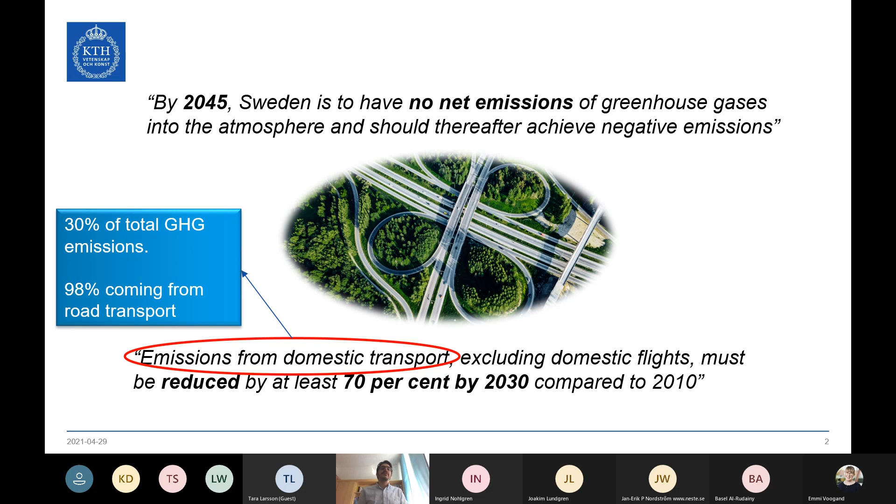Here, biofuels of course play a very important role in this transformation, but the question is whether we are really able to achieve these goals. The numbers needed are somewhat high. We need around 3 million cubic meters of drop-in biofuels by 2030. By drop-in biofuels, we mean fuels that have the same chemical structure and composition as the ones that come from fossil-based resources. And we see that this number currently cannot be met with the existing production routes.

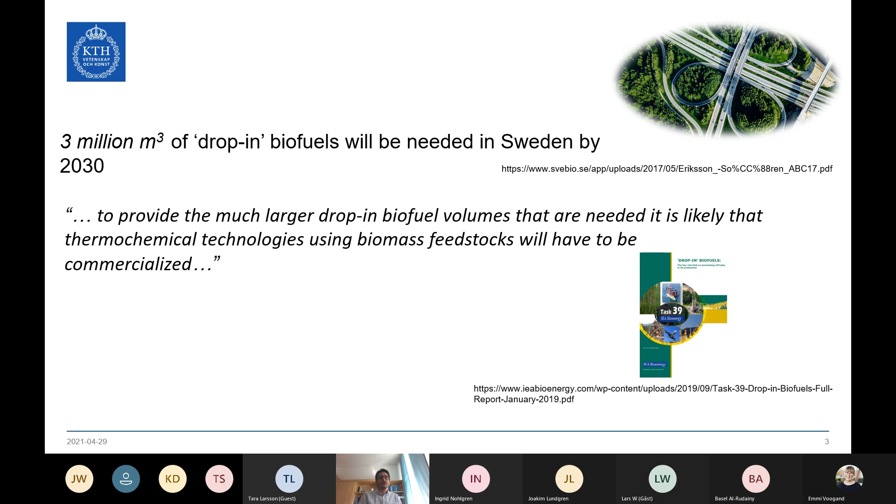In the same wavelength, a recent report by the International Energy Agency indicates that in order to provide the much larger drop-in biofuel volumes that we need, we need to commercialize thermochemical technologies that utilize biomass feedstocks. So in order to achieve this 3 million goal, we need to use forest residues and forest resources. But does Sweden have the potential to achieve this amount of fuels via thermochemical processing? Well, the answer is yes.

The forest sector has a very high energy potential in Sweden, and logging residues and sawmill byproducts account for around 7 to 27 terawatt hours of energy potential, which almost covers the 3 million cubic meter demand for biofuels in Sweden. Therefore, the forestry sector and the utilization of lignocellulosic residues is crucial for reshaping the transport sector. The production will be accelerated and enhanced by the commercialization of thermochemical treatment. But what do we actually mean by thermochemical treatment of biomass for production of drop-in biofuels?

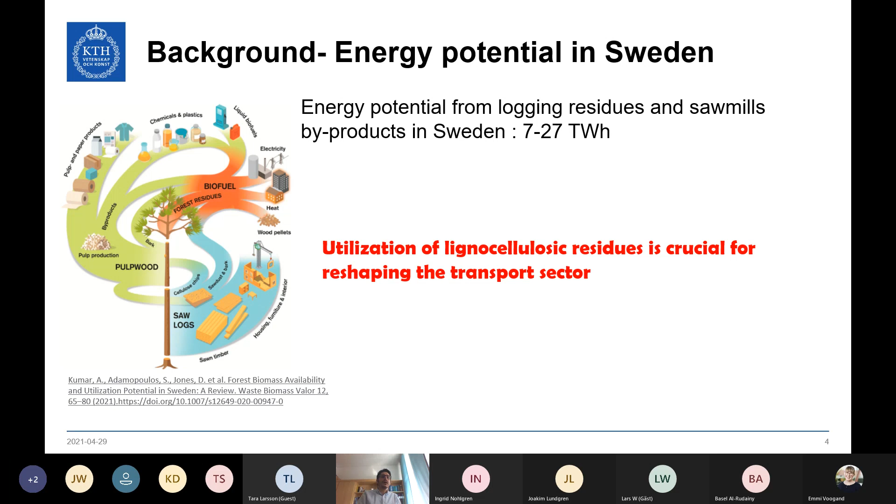If we consider the biomass resources, the forest residues, we have two main thermochemical routes that can achieve production of drop-in biofuels. These include gasification, where the biomass is subjected to a high-temperature environment in the presence of air or oxygen, and gives rise to gaseous molecules, also called syngas. Those molecules that are formed undergo a synthesis process.

Typically, the synthesis we use is the so-called Fischer-Tropsch process, a process invented almost 100 years ago by two German chemists, Franz Fischer and Hans Tropsch. And the product of this synthetic process is a fuel which is identical to the fuels we can actually get from oil.

The other thermochemical route that we typically use for biomass processing is biomass pyrolysis, which is practically the thermal decomposition of biomass. We heat the biomass in the absence of any oxidizer, and the products are vapors, or liquids if we cool them down. And they undergo another type of treatment and upgrading or synthesis process, if you like, that produces a drop-in biofuel.

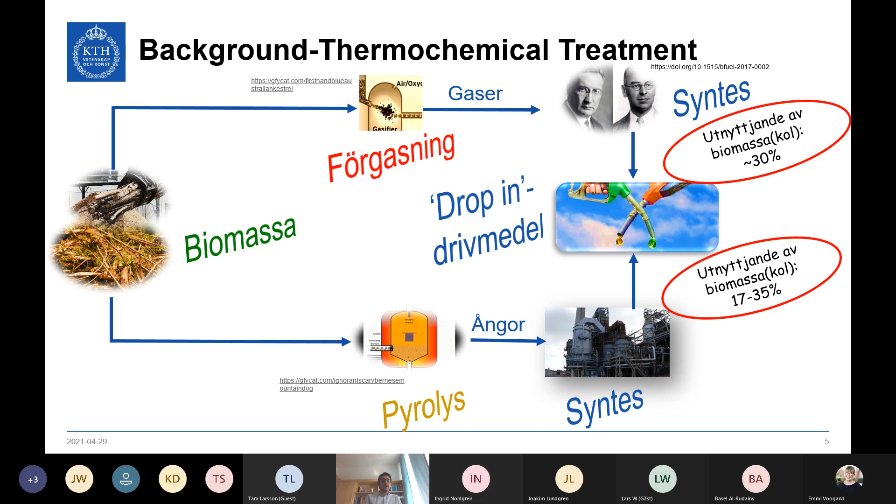So as we see, almost 1/3 of the carbon that is actually present in the biomass can be converted into liquid fuel. So if we are to achieve the goals for 2030 and replacement of fossil-based transportation fuels, we need to be more efficient in the conversion of the biomass contained carbon, given that the availability of biomass is sometimes limited. So the BioFlex project actually tried to answer 3 questions.

Those 3 questions are whether we can really improve the carbon utilization in the biomass conversion, and if so, what do we really need to do in order to do that? Do we really need to reinvent the wheel or invest in research time for new processes that can give us better carbon utilization? We have to think that we need to act fast in order to achieve the goals that we have set for 2030.

2030 is not far. So it has to be processes that can be implemented relatively fast. And the results should be, of course, tangible within a very short time. Of course, other processes can also be researched in parallel to these activities, but we need to act now. And the third question that we try to answer is, what happens with the fuel mix demand? How can the processes that we design today, targeting 1 or more products, meet the future fuel mix demand in Sweden in particular?

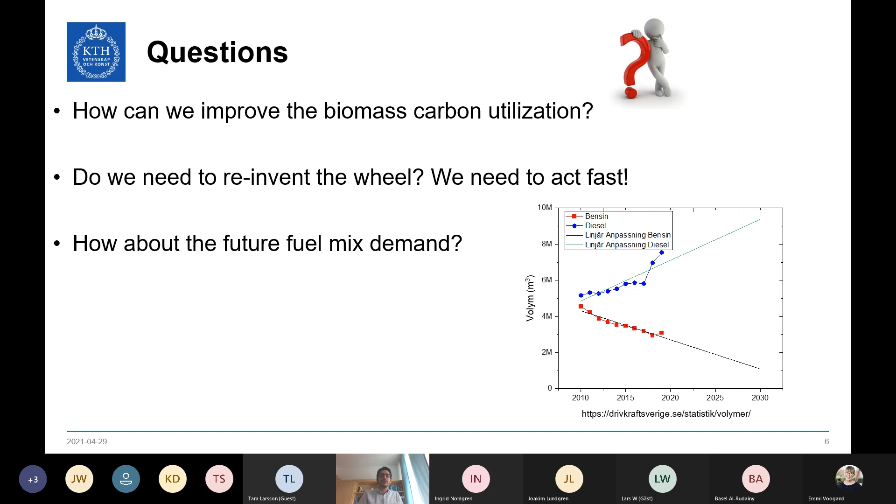Here we see the volumes of fossil-based gasoline and diesel that have been used in Sweden the past years, and a linear projection to 2030. We see that the fuel mix demand shifts towards diesel production. We still, though, have a considerable demand for gasoline in place even by 2030. So the concept of the BioFlex project is to try to answer all of those 3 questions. That means to try to provide efficient carbon conversion with processes that can be implemented fast, in a short time, and thirdly, processes that can produce fuels or products that are flexible in composition in order to meet the market requirements.

So the BioFlex concept includes the biomass treatment via pyrolysis mainly, and then synergies with gasification, that is the solid carbon that is produced in the pyrolysis section giving a feedstock for the gasification, and gasification itself providing energy for the pyrolysis section. And ideally, those 2 primary products of those 2 processes, the pyrolysis vapors and the gasification gases, would need 1 synthesis process in order to produce the drop-in biofuel.

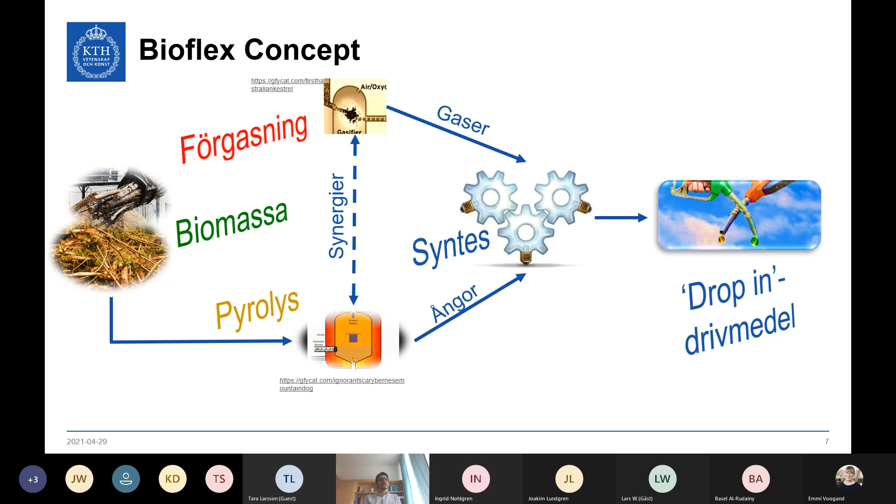But if we now take a closer look at the synthesis process, is it really realistic to consider that we can have one synthesis process for those two primary streams of the thermochemical treatment of biomass to produce the drop-in biofuels? Unfortunately, the answer is no, because given the completely different chemical nature of those two streams, the gases from the gasification and the vapors from pyrolysis, it is almost impossible to find one synthetic route to produce the drop-in biofuels. However, instead, we can produce some platform molecule or building block from both streams that can be effectively converted into a drop-in biofuel, and this process can also be flexible in terms of product composition.

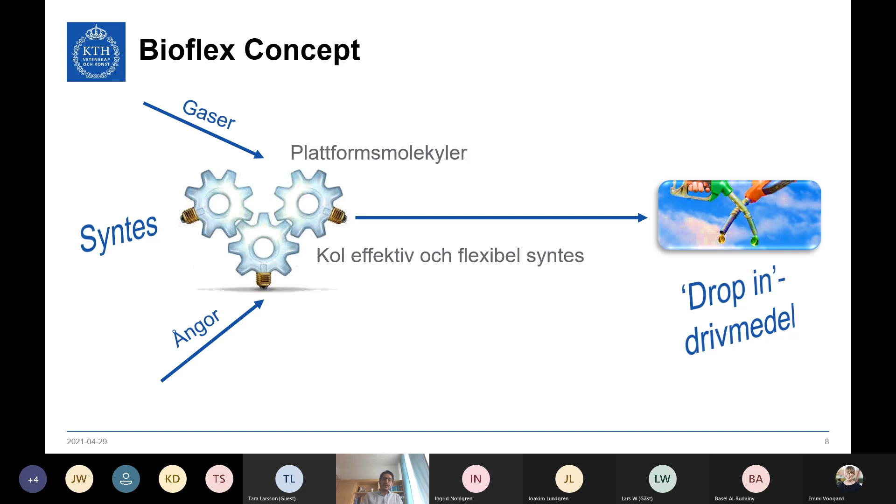That molecule has been identified, and it's actually not a molecule but a group of molecules, the olefins, which are light hydrocarbons with carbon numbers ranging from 2 to 4. As an indication, gasoline has carbon numbers of 6 plus, and diesel carbon numbers of 11 plus. And these molecules can be converted efficiently into both gasoline and diesel range hydrocarbons or drop-in fuels via the Mobil olefins to gasoline and distillate process. This process was developed by Mobil, now called ExxonMobil, in the late 70s after the oil crisis.

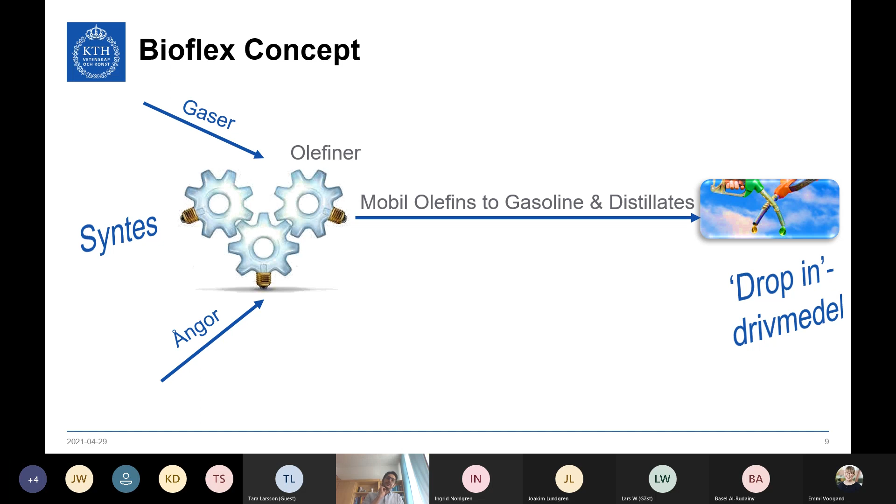But why specifically olefins? What is particular with those types of molecules? Well, first of all, they can be converted into hydrocarbons with a very high carbon efficiency. Typically, more than 95% of the carbon contained in the olefins can be converted into liquid fuels via the Mobil process. And of course, they are a chemical commodity of high demand, which can give rise to the production of different chemicals, polymers, lubricants, and so on. And this gives an extra value to the BioFlex concept, because even after a complete electrification of the transportation fleet, there will still be a market for the olefins that this process will produce.

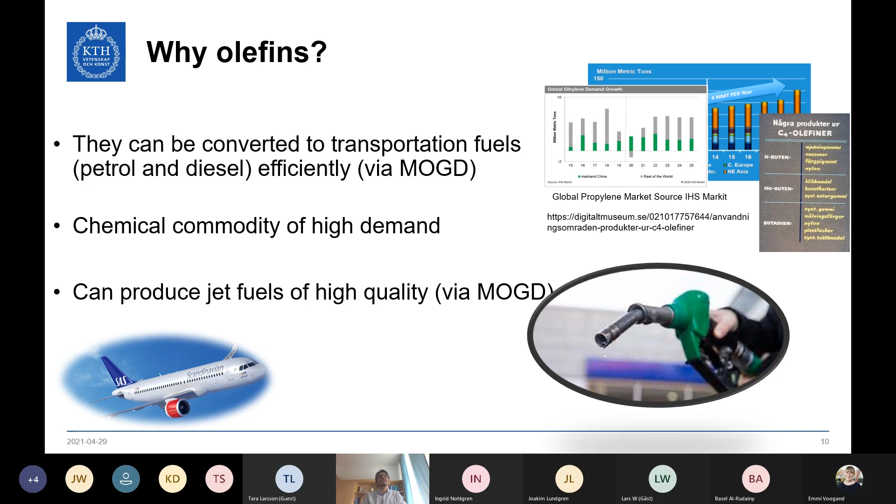Thirdly, on a similar wavelength, we can also produce jet fuels of high quality via the Mobil process, which is also an advantage if we consider that aviation fuels will probably be longer in the market as compared to the transportation fuels. So now it is clear why olefins were chosen, and in this project we investigated three main scenarios.

The first process concept included the gasification route for biomass, the standalone gasification route, where the biomass is converted into syngas using oxygen as an oxidizer, and then the produced syngas is converted into light olefins, and then the olefins converted into transportation fuels via the Mobil process.

The second process concept is a combined pyrolysis and gasification route, where the biomass is pyrolyzed and the solid carbon is converted into syngas via the gasification with oxygen. And both the primary products from the gasification and the pyrolysis are then converted into olefins, and then the olefins again are converted into drop-in biofuels.

The third process that was investigated is very similar to process concept 2, with the difference here that air is used instead of oxygen for the gasification part, which means that in the second process concept, the nitrogen is separated from the air before the gasification, while in process concept 3, the nitrogen is separated downstream the gasification before the syngas to olefins conversion process.

In all the process scenarios investigated, small to medium scale plants were considered, 5 to 50 megawatt biomass thermal input. Roughly 1 ton per hour of biomass, just to give you an idea, is around 5 megawatt of size. And for every concept, 2 product mixes were considered, those corresponding to the 2020 and 2030 fuel mix. When we say fuel mix, we refer to a ratio of gasoline and diesel.

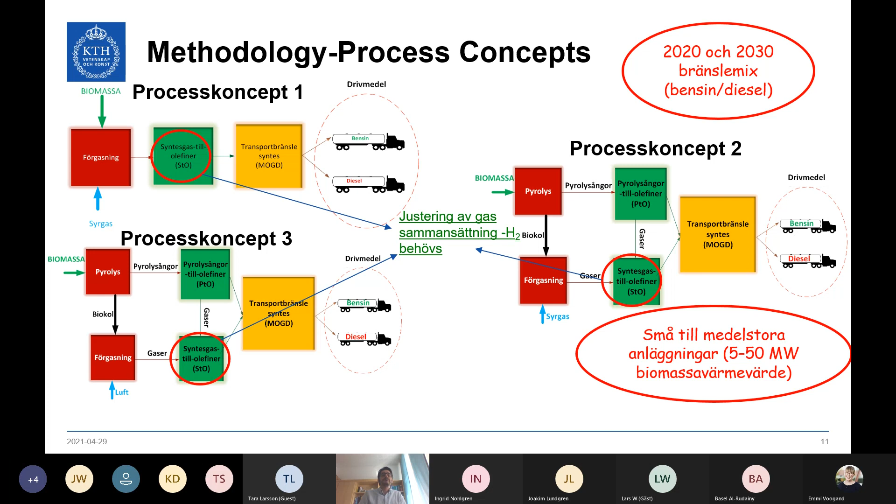So if we now go to the main process analysis results, we see that the combined pyrolysis and gasification scheme, which is represented in process concepts 2 and 3, gives considerably higher carbon efficiencies, almost 40%, while the standalone gasification of biomass gives a carbon efficiency of almost 30%, which is typical of a gasification process for production of drop-in biofuels.

Similarly, the energy efficiency for process concepts 2 and 3, which are the combined pyrolysis and gasification processes, is almost 50%, including also the electricity needs. So from those numbers, it's clear that the combined pyrolysis and gasification plant actually gives a better performance and a better overall efficiency.

One thing which is crucial though for such a process is the performance of the gas separation units, because any carbon losses in those units are very crucial if we want to achieve the high carbon efficiencies here.

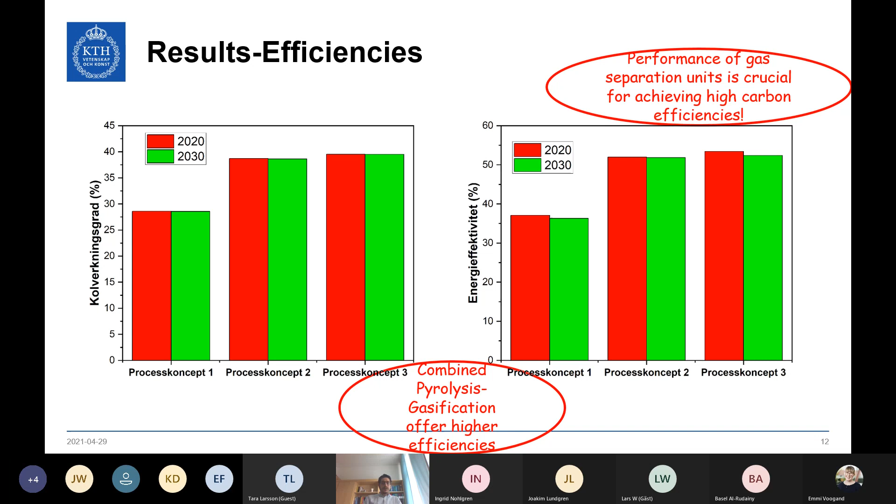But what do these numbers actually mean in terms of the 2030 goals? What do we really achieve? If we translate those numbers into actual fuel production, we see that we can achieve more than 300 liters of total liquid fuels if we combine the gasification and pyrolysis routes.

And also we see that the direct CO2 savings by substitution of the fossil-based fuels is almost 800 kilos per ton of biomass that is utilized in the process. Just for comparison, 1 ton of CO2 roughly corresponds to driving almost 6,000 kilometers with a fossil-based diesel car.

We see that the adjustment in process conditions to match the 2030 and the 2020 fuel mix does not affect the efficiencies nor the CO2 savings in any of the process concepts 2 and 3, which is indicative of the flexibility, of course, of the Mobil process. And that also means that the process can be adjusted to market situations quite easily.

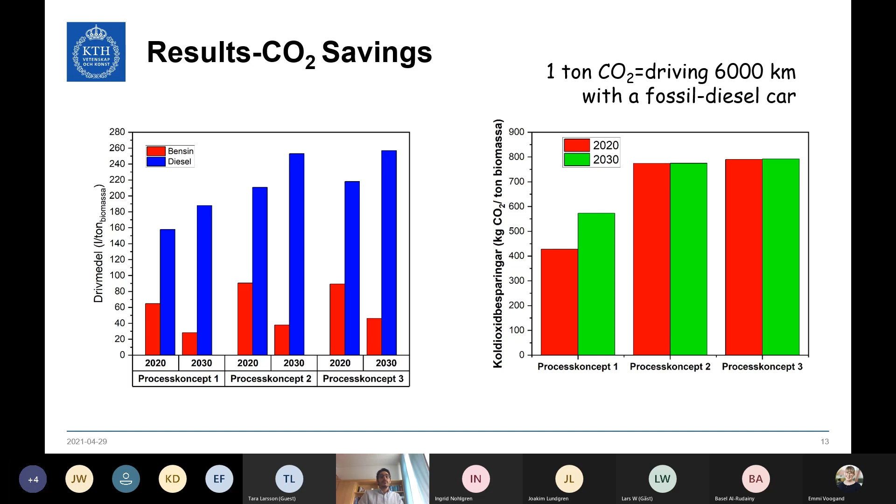During the conversion of the CO, or the adjustment of the composition of the gasification gas, the CO2 was captured using an advanced adsorption technique. For those who are interested, the sorption enhanced water gas shift reaction was used.

And we see that for process concept 1, which is the standalone gasification, almost 900 kilograms of CO2 per ton of biomass are saved. This is reasonable if one recalls that this particular process concept has the lowest degree of carbon utilization to the liquid fuel. Now we see why, because a lot of carbon is converted in this process step into CO2. For process concepts 2 and 3, the capture is smaller because, of course, the carbon is mostly utilized for production of liquid fuels.

A secondary look into the CO2 savings from the production of green olefins shows that almost 200 kilos of CO2 can be saved if olefins are produced from biomass compared to the naphtha cracking that is typically used today. That result indicates that most of the CO2 savings can actually come from the direct substitution of the transportation fuel if we want to achieve the 2030 goals. And replacement of olefins should be considered as a secondary target.

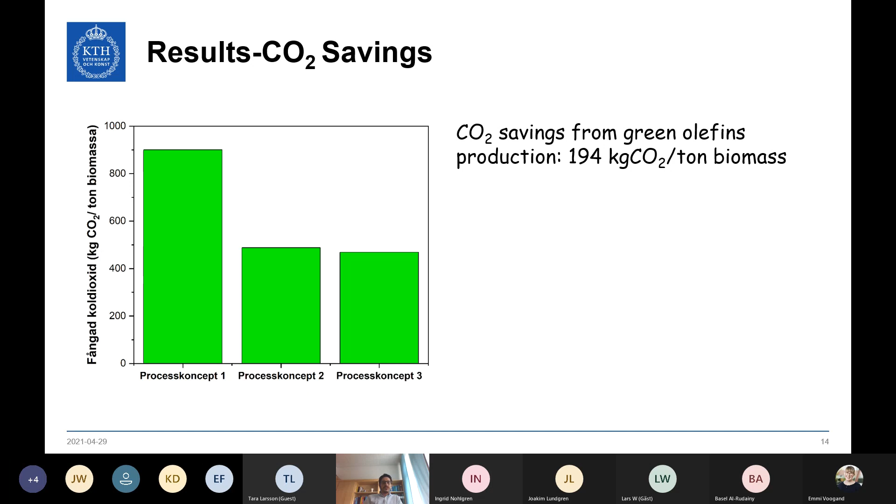So is everything really so perfect with this process? Why don't we commercialize it then? Well, the answer comes from the process economics, unfortunately, because economic analysis showed that, especially for small-scale plants, the production cost is really high. For the standalone gasification it is almost 26 crowns per liter of liquid product. But we see that by 2030, the prices are a bit lower because of the different fuel mix and the different hydrotreatment requirements.

The production costs for process concepts 2 and 3 are lower, still high, but lower when compared to the standalone gasification. But still, we see that even for the 50 megawatt size plant, the production costs are around 10 to 12 crowns per liter. And indicatively, in January 2021, the average cost for fossil gasoline was 4.91 crowns per liter, and for diesel it was 6.87. So we see that if we just compare the production costs, this process is really off.

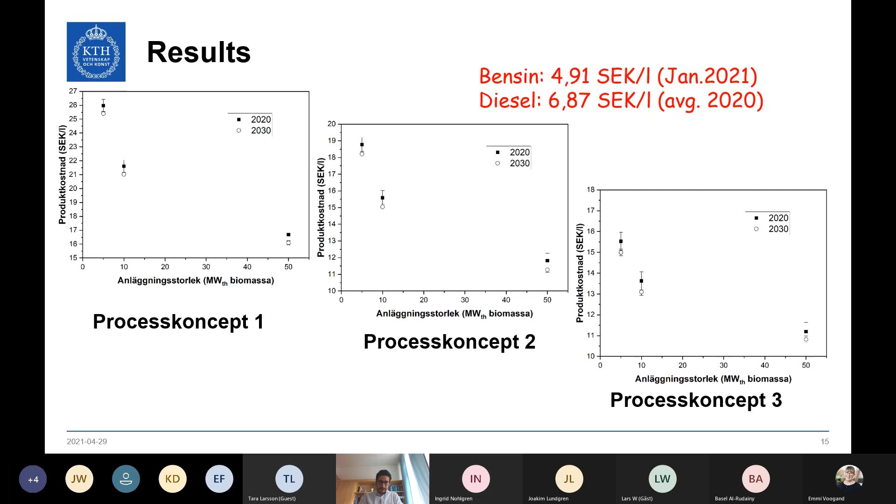So if we try to wrap up everything we have seen from this analysis, it was clear that the combination of pyrolysis and gasification can provide considerably higher efficiencies compared to standalone gasification or even standalone pyrolysis routes. And this is due to the synergies that exist between the thermochemical treatment of solid biomass, but also due to the synergies that can exist during the conversion of the primary products into olefins, that is the conversion of the pyrolysis vapors into olefins and the conversion of the gasification gas into olefins.

The synthesis of olefins as an intermediate is promising because it offers a flexible production of biofuels that can meet the fluctuating fuel market. And the adjustment of the process conditions does not include any additional carbon losses or any other energy penalties. All of the processes were actually heat self-sufficient by combusting some off gases of the process here and there. However, the syngas to olefins part requires several reaction and separation steps if we are to achieve high efficiencies, which of course increases the complexity of the concept.

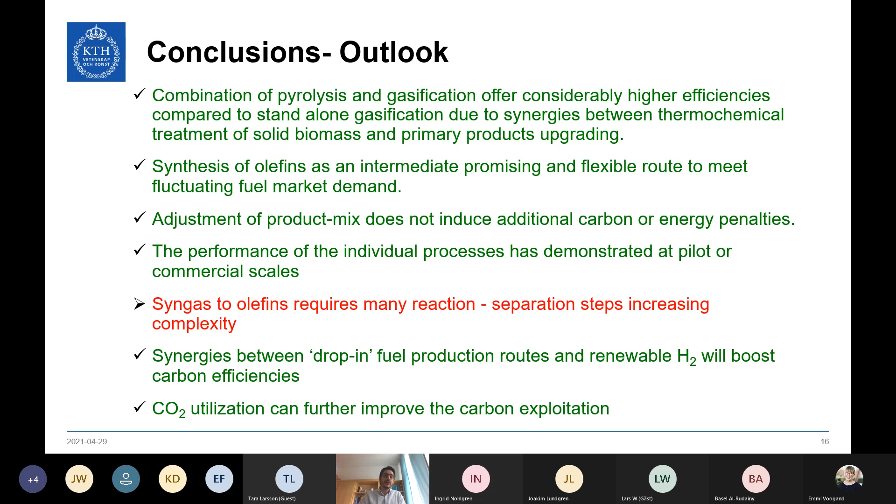CO2 utilization is also important here, especially if renewable hydrogen production is included, and especially if we want to produce olefins for chemical production, because then the product has a longer lifetime, so we can store the carbon more efficiently in society. However, the production cost is too high when compared to fossil-based petrol and diesel. Therefore, we should balance economic performance with environmental goals in order not to simply reject such a process for economic reasons. Future cost reductions, especially in hydrogen generation from electrolysis, can offer at least a 3 to 5% reduction in the production cost of the final product.

While direct CO2 mitigation by biofuels production should be the main goal for achieving the 2030 goals, policies should be put in place in order to motivate CO2 net removal from green resources, such as paying dividends to negative CO2 emitters, for example.